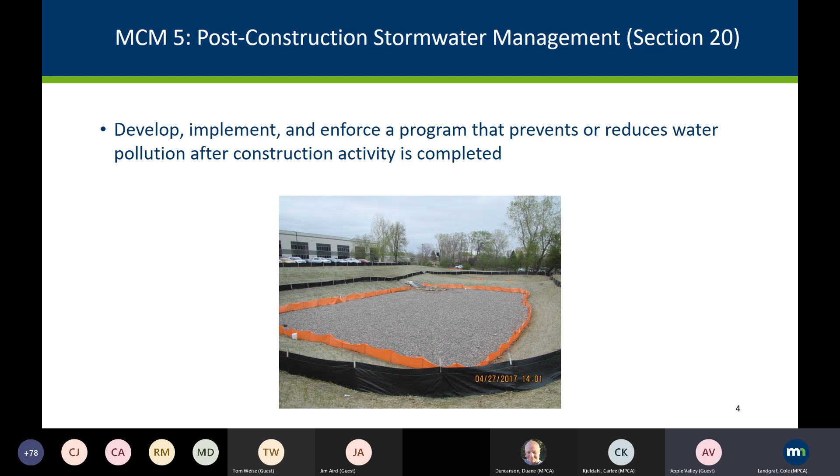What are the different components? How do you do that? What makes up the permit requirements for MCM5? First and foremost, you need to have a regulatory mechanism that establishes your legal basis, your regulatory basis for requiring those long-term BMPs after construction. You need to have a legal mechanism for the long-term maintenance of BMPs that have been implemented in MCM5 requirements, specifically those of your regulatory mechanism that you do not own or operate. You need to keep an inventory of BMPs that include that executed legal mechanism.

You also need to have written site plan review procedures. You also need to have staff training, enforcement response procedures for following up when you find non-compliance related to your regulatory mechanisms. Keep documentation, and then also perform an annual assessment of your program. And I will go into each of these in the slides coming up here. So I include a reference in the top right of your screen, so if you do want to follow along in the permit, it is available there for you.

First and foremost, like I said, you need to establish that foundation for your program, which we at the PCA believe is your regulatory mechanism. So to the extent allowable under state or local law, you're required to develop, implement, and enforce a regulatory mechanism that includes items 20.4 through 20.15 of the MS4 general permit.

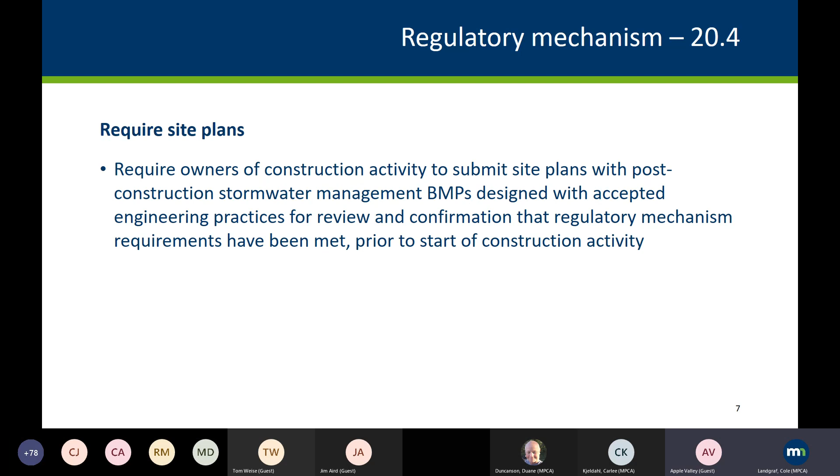Your regulatory mechanism also must require the submittal of site plans. You need to require that the owners of construction activity within your jurisdiction submit site plans with post-construction stormwater management BMPs designed with accepted engineering practices for your review and confirmation that the regulatory mechanism requirements have been met before the start of construction activity.

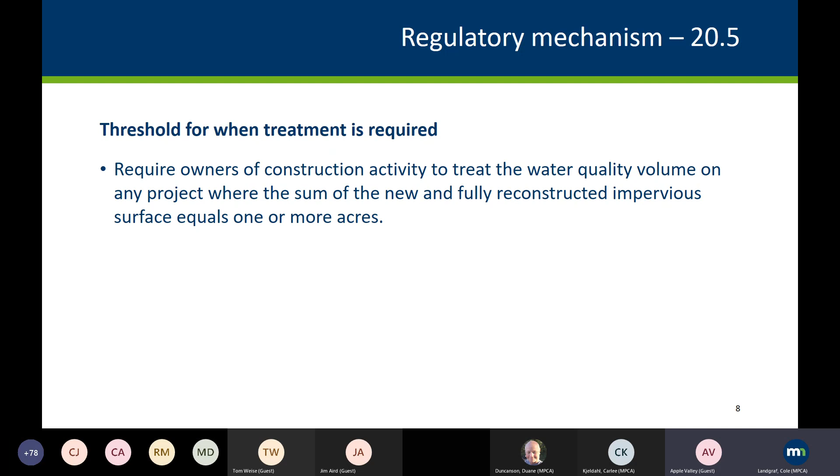In the new 2020 permit, we've also established a threshold for when treatment is required. So we require, as part of your regulatory mechanism, that you require owners of construction activity to treat the water quality volume on any project where the sum of the new and fully reconstructed impervious surface equals 1 or more acres. That's something in the 2013 permit, we really didn't have a clear threshold. In this one, it's all based on impervious surface.

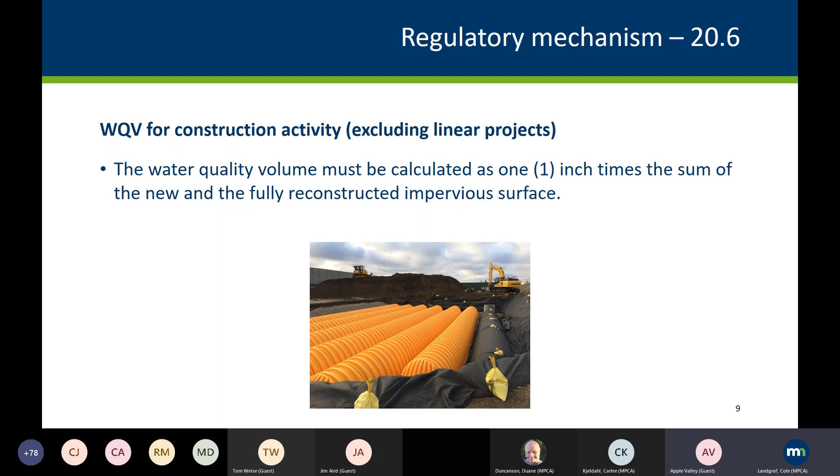We also have a calculation for the water quality volume for construction activity, which excludes linear projects. Here, the water quality volume must be calculated as 1 inch times the sum of the new and the fully reconstructed impervious surface. And then the permit also establishes a separate water quality volume for linear projects. So for linear projects, the water quality volume must be calculated as the larger of 1 inch times the new impervious surface, or 1/2 inch times the sum of the new and fully reconstructed impervious surface.

In the event you're unable to treat the entire water quality volume within your existing right-of-way, you need to attempt to obtain additional right-of-way, easement, or other permission to try and get that full treatment. In the event you've explored your options and you're not able to get the full treatment for linear projects specifically, you're allowed to maximize treatment and get as much treatment as you can. If you have, let's say, a road redevelopment project, and you're not able to get that full 1/2 inch of treatment after exploring additional right-of-way, you can look to maximize. So maybe you're not going to get the full 1/2 inch, maybe you're going to get a 1/4 inch, 1/10 of an inch, but you're going to try to get as much as possible near that goal.

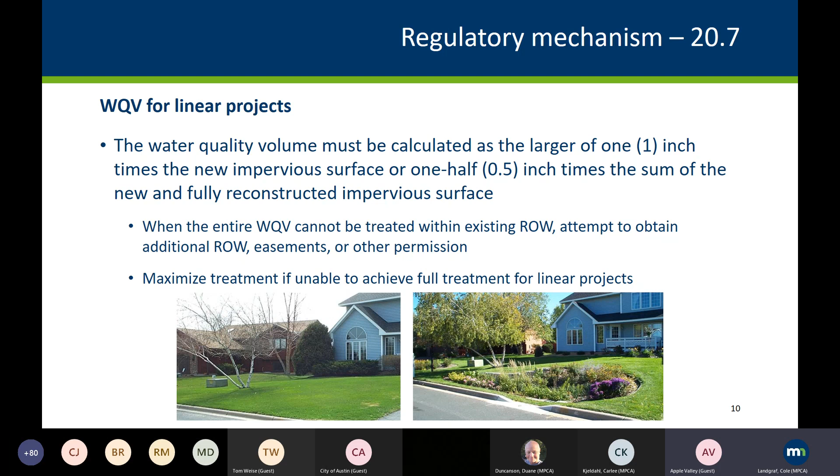So it's important to know what the definition of fully reconstructed means, to know when that trigger comes into play for post-construction stormwater management BMPs. So what does fully reconstructed mean? It means where the impervious surfaces have been removed down to the underlying soils. It does not include things like structure renovation, mill and overlay projects, and other pavement rehabilitation projects that do not expose underlying soils. It also does not include maintenance activities such as utility, catch basin, pipe repair and replacement, lighting, and pedestrian ramp improvements.

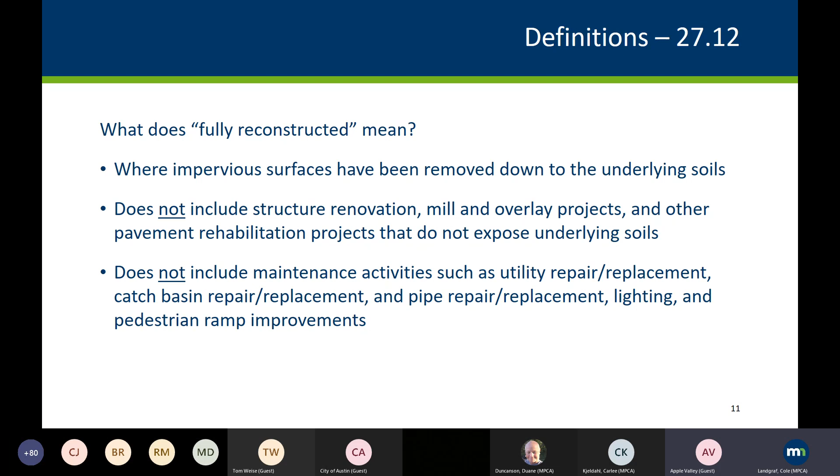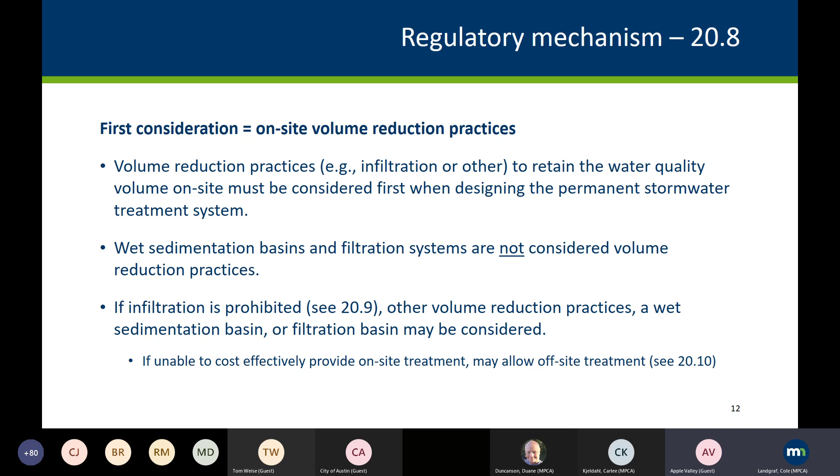We also require that your regulatory mechanism first considers on-site volume reduction practices. This could be infiltration or a reuse system or a green roof, but we ask that you always explore on-site volume reduction practices first when designing the permanent stormwater treatment system. The MS4 general permit does not consider wet sedimentation basins and filtration systems as volume reduction practices. And in the event that infiltration is prohibited, you may consider other volume reduction practices other than infiltration. You may consider a wet sedimentation basin or a filtration basin. We also do have an off-ramp for instances where you're not able to cost effectively provide on-site treatment, and you may explore off-site treatment.

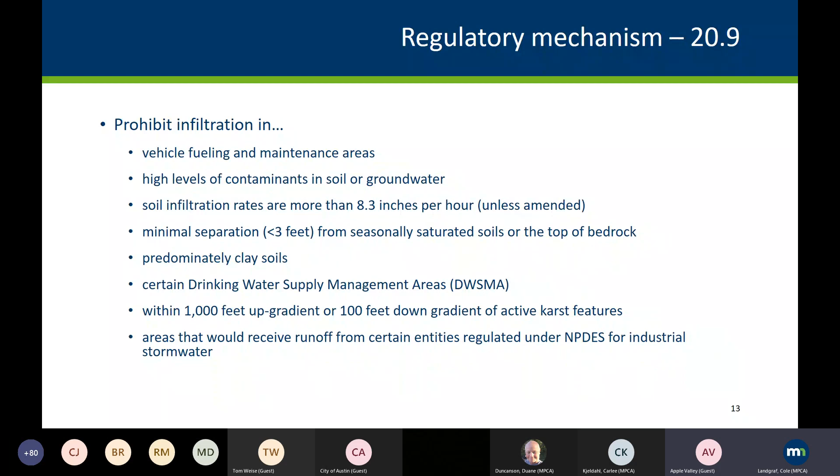So like I mentioned in the previous slide, there are certain conditions where we don't want you to allow for stormwater infiltration. We don't want stormwater infiltration in vehicle fueling and maintenance areas, where you may mobilize high levels of contaminants in soil or groundwater, where soil infiltration rates are more than 8.3 inches per hour, where there's minimal separation from seasonally saturated soils or the top of bedrock, where there's predominantly clay soils, in certain drinking water supply management areas, particularly those in high and very high vulnerability areas, and within emergency response areas. Also within 1,000 feet up gradient or 100 feet down gradient of active karst features, and then in some areas that would receive runoff from entities regulated under NPDES for industrial stormwater. These are places like automobile scrap yards and hazardous waste facilities.

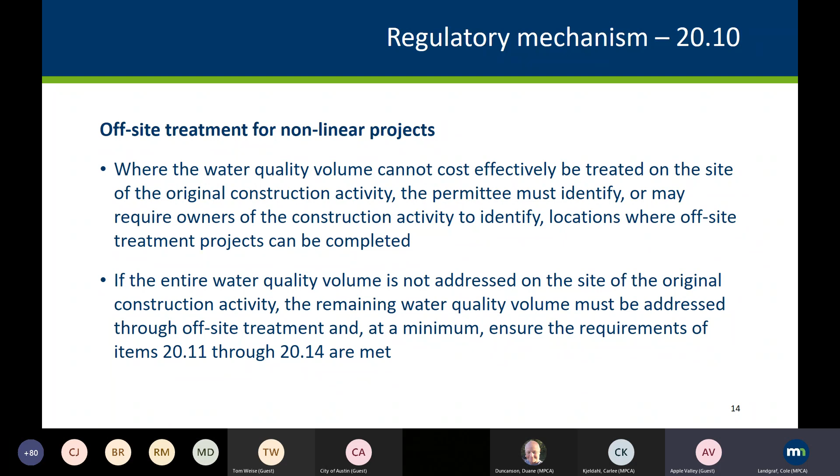We also have a requirement for off-site treatment for non-linear projects. Where the entire water quality volume cannot be cost-effectively treated on site, you must identify, or you may require the owners of construction activity to identify, locations off-site where treatment projects can be completed. If the entire water quality volume is not addressed on the original site of construction activity, the remaining water quality volume must be addressed through off-site treatment and ensure the requirements of 20.11 through 20.14 are met.

So first and foremost, we have a mitigation sequence. How do you determine the best or most appropriate site for off-site treatment? So we require that you ensure off-site treatment projects are selected in the following order of preference. Highest preference for off-site treatment are locations that yield benefits to the same receiving water that receives runoff in the original construction activity. Next consideration would be the locations within the same DNR catchment area as the original construction activity.

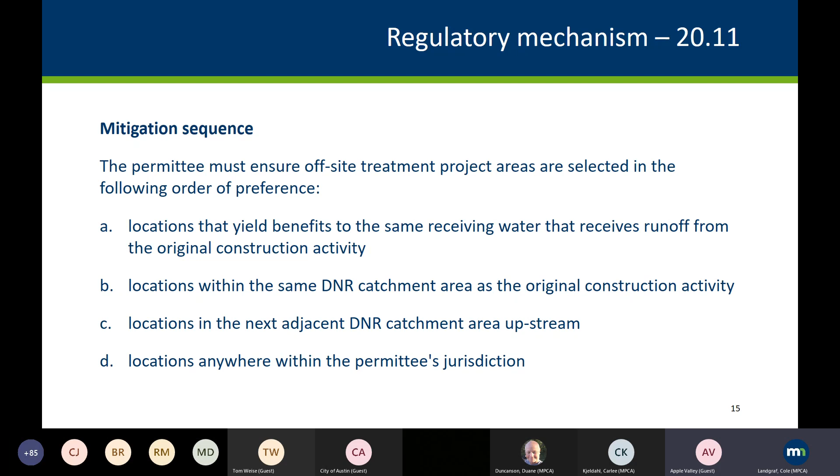Next is locations in the next adjacent DNR catchment area upstream. And then finally, you may consider locations anywhere within your jurisdiction for offsite treatment projects.

We also require in MCM5 that offsite treatment projects involve the creation of a new structural stormwater BMP, the retrofit of an existing structural stormwater BMP, or the use of a properly designed regional structural stormwater BMP. And we do not accept routine maintenance already required by the permit to meet this requirement. You have to retrofit or create a new BMP or use that existing properly designed regional BMP.

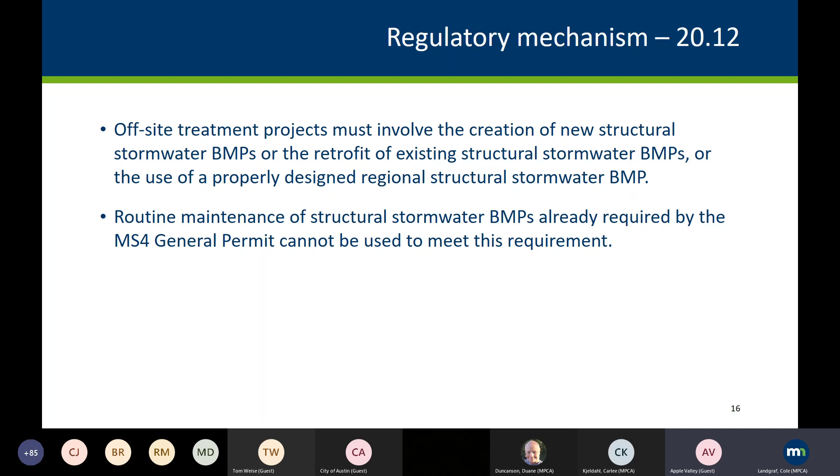We also have a requirement that offsite treatment projects must be completed no later than 24 months after the start of original construction activity. But we do have a caveat there. We do allow, in the event that you determine you can't do it within 24 months of the project starting, you are allowed to provide the reasons and the schedule for completing the offsite treatment project in the MS4 annual report.

This was something during the public notice process of the 2020 permit. We did hear from a number of stakeholders that the 24-month timeline could be challenging in some instances, and some additional flexibility would make this option more attainable.

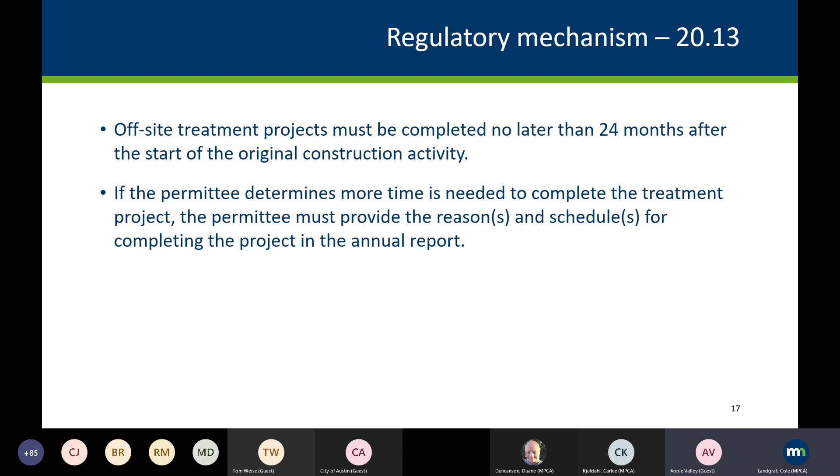We also allow for payment for offsite treatment. So in the event that you do receive payment from an owner of a construction activity for offsite treatment, you are required to apply that payment towards a public stormwater project. And you have to make sure that that project also complies with the requirements in the previous slides.

So again, creating a new or retrofit BMP, making sure that those projects follow the mitigation sequence, and then also making sure that you complete the project within 24 months or document that reason and schedule for the project in the annual report.

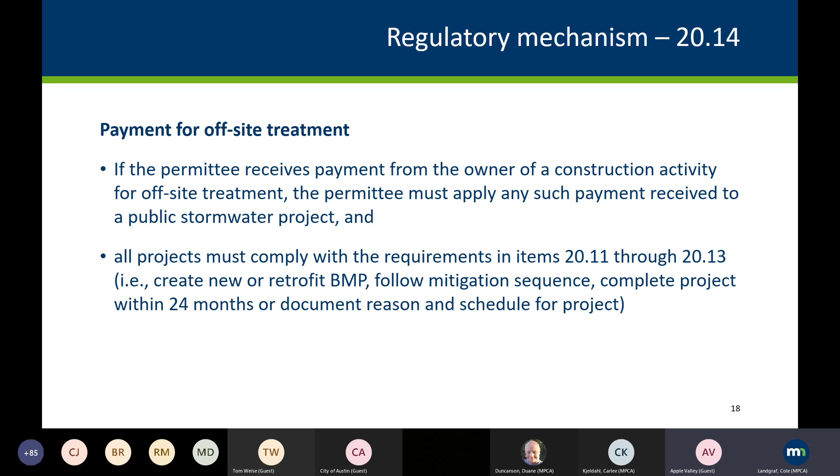So many of you are probably well aware of this by now, but we do have an MCM5 compliance flowchart available on our website. Carly, maybe if you have it available, put that in the chat for folks. But this is kind of a nice 2-page document that breaks down when MCM5 requirements apply, which ones apply, and you can follow the flow chart to make determinations on what applies and what considerations you can make along the way. So I highly recommend you take a look at that if you have not already. And this will be just a helpful tool to make sure you are meeting MCM5 requirements.

So moving on from the regulatory mechanism, the standards portion, I guess I would say, we also require that you establish a legal mechanism for the long-term maintenance of BMPs not owned or operated by the permittee. This is an existing requirement of the 2013 permit, but just want to emphasize it again here, that you must make sure that you have this legal mechanism in place. This is generally going to be for those privately owned BMPs that were installed to meet your MCM5 regulatory mechanism requirements.

This legal mechanism must allow you to conduct inspections of structural stormwater BMPs, perform maintenance, and assess costs for those structural stormwater BMPs when you determine the owner of that BMP has not ensured proper function. You must also preserve your right to ensure maintenance responsibility when responsibilities are legally transferred to another party, and you must protect and preserve those BMPs that were installed as a result of construction activity.

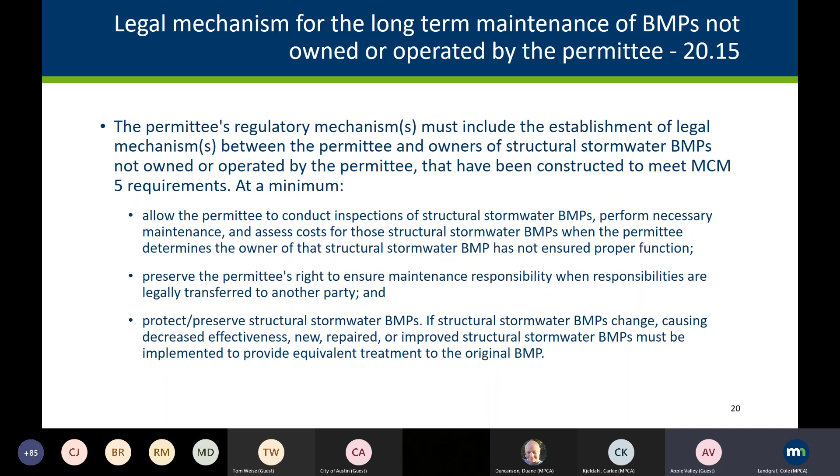Moving on, you are also expected to keep an inventory, a written or mapped inventory of all the different structural storm BMPs that meet the following criteria. So BMPs that have an executed legal mechanism, those long-term maintenance agreements in place, and the BMP was implemented on or after August 1st of 2013, need to be in this inventory. So these are specifically those permanent stormwater BMPs that were implemented to meet your MCM5 regulatory mechanism, keeping track of where those are located, in written or mapped form.

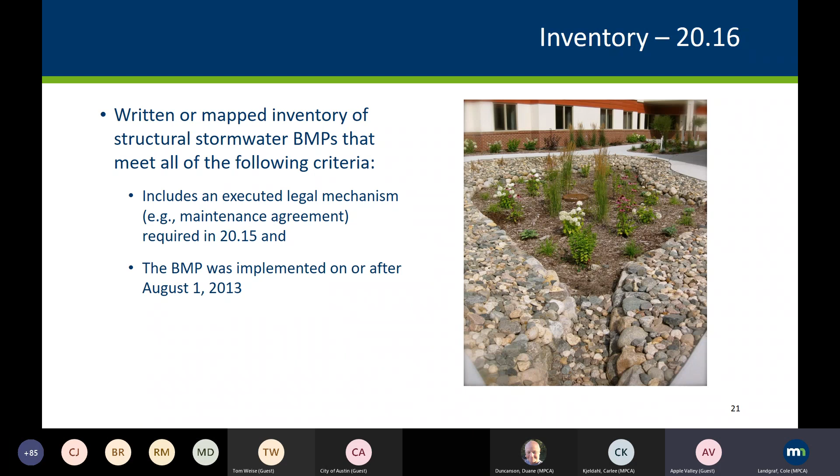You're also expected to have site plan review procedures: implement written procedures for site plan reviews conducted by you before the start of construction activity, essentially to ensure compliance with the requirements of your own regulatory mechanism. What I'll comment on here is just make sure the procedures are reflective of your program. If that's a flow chart, if that's a decision tree, just make sure it's something that works for your organization.

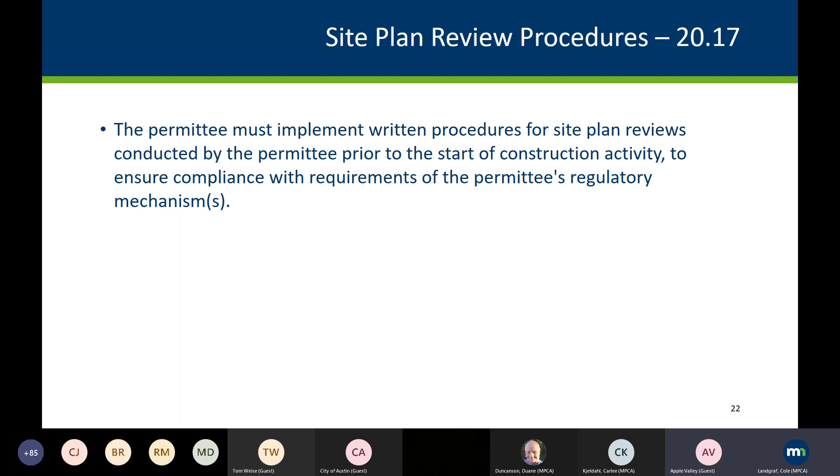And make sure you're updating them periodically too. If things change over time, which is kind of the goal with the MS4 permit, your program's not going to remain static. You're going to find efficiencies and more effective ways to do things over time. Just make sure you're keeping those procedures up to date.

We also expect staff training. You're training individuals, making sure that they receive training commensurate with their responsibilities as they relate to your post-construction stormwater management program. And we identify individuals that are responsible for conducting site plan reviews or enforcement related to MCM5. And anyone that's been trained, after that initial training, we do require in the permit that they receive some sort of a refresher training every 3 calendar years following their initial training.

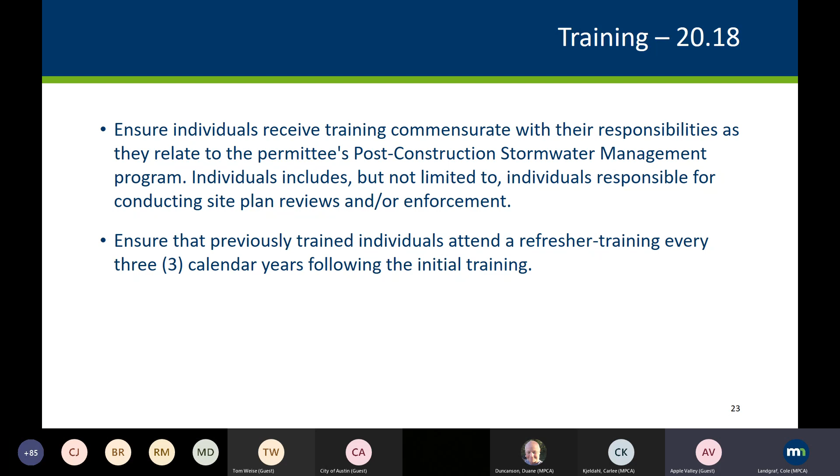Enforcement response procedures. So the permit requires that you maintain written enforcement response procedures to compel compliance with your MCM5 regulatory mechanisms. At a minimum, your ERPs must include a description of the enforcement tools available to you and the guidelines for the use of each tool, and also identify the name or position title of responsible people for conducting enforcement for your organization.

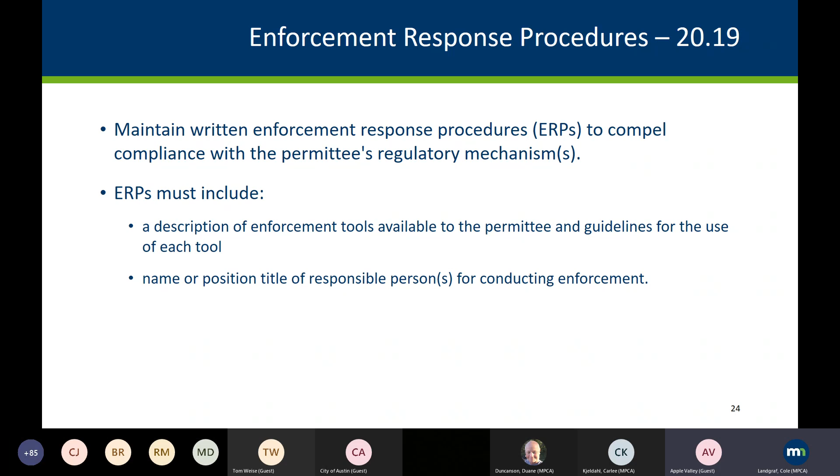And as far as MCM5 enforcement goes, it's probably going to be, what's your process when you identify a failing permanent BMP for enforcing that long-term legal mechanism, or in the event that you've approved or confirmed a site plan met your regulatory mechanisms, you discover after the fact that that's not what got installed. Something you identified as the BMP changed. It's not as effective as you thought. What's your process for compelling compliance through your regulatory mechanism?

Documentation. So we have documentation components for site plans, trainings, and enforcement conducted. So first and foremost, whenever you conduct a site plan review, we want you to maintain supporting documentation used to determine compliance with MCM5, including any calculations you made for the permanent stormwater treatment system, the water quality volume treated through volume reduction practices compared to the total water quality volume required to be treated, and documentation associated with any off-site treatment projects

that you authorized, including rationale to support the location of the permanent stormwater treatment projects, any payments received and used for a public stormwater project, as well as all legal mechanisms drafted, those long-term maintenance agreements, including dates and the responsible parties involved. We also expect that you keep documentation of any trainings that staff attend, including topic matter covered, names of those individuals, their department within your organization, and the date of any events.

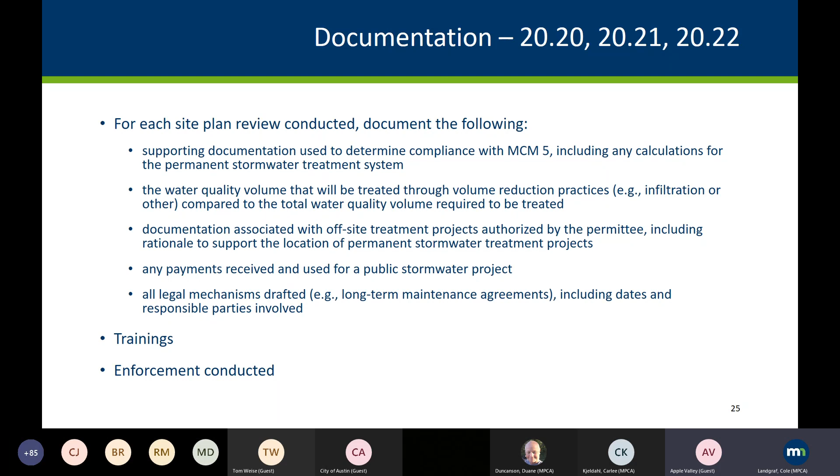And then finally, we also require that you document any enforcement that you conduct related to MCM5, specific to your enforcement response procedures. This is the date of discovery of the violations, who's responsible for the violation, any corrective actions or referrals to other organizations, and then also make sure you're keeping documentation or a record when violations get resolved.

And then finally, for MCM5, we also require that you conduct an annual assessment. So this is a component of every MCM, and it's basically this idea that you are reflecting, looking back at your program to make sure you are meeting the permit requirements, and you're looking for avenues or ways that you can improve your program.

We also require: are you achieving those measurable requirements? Measurable requirements are activities that must be documented or tracked as applicable to the MCM. So for MCM5, it's going to be things like, do you have an updated inventory? Are you training the appropriate staff? Do you have the site plan review procedures in place and are you reviewing plans before construction activity begins? Performing inspections, for example, of long-term BMPs.

Any enforcement conducted. Make sure you're having an intentional opportunity every year to look back at your program and see if you're meeting permit requirements, and whether there are areas where you might be able to improve or make things more efficient or effective. And then finally, this component requires that you complete this assessment before you submit your annual report, and you also need to document any modifications you make to your program as a result of this assessment.

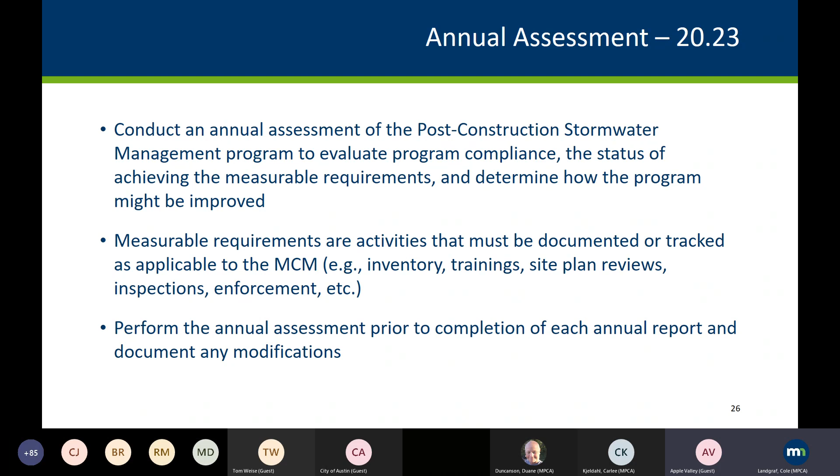So we do have some guidance available on MCM5. It's primarily available in the Minnesota Stormwater Manual, in the digital document library. Carlee, maybe you can put the link in the chat. But if you just either go to the homepage of the Minnesota Stormwater Manual or Google MS4 DDL, it should be the first search result that comes up. You can go to it that way.

And if you go to MCM5, we do have some examples that MS4 permittees have generously shared of different materials such as long-term maintenance agreements, ordinances, documentation, and different site plan review procedures. One thing to note here is this is something we do need to update over time.

These materials were originally reviewed under the 2013 MS4 general permit, and this is something we need to populate over time as permittees allow us to share materials we may discover during audits, to get up to speed with the 2020 MS4 general permit. A lot of the materials are still relevant for the 2020 MS4 general permit, but if you're confused or want to double check, I highly recommend comparing any document you take from this site against the 2020 permit requirements.

And also, if you're concerned, feel free to reach out to your assigned MS4 staff person, and they can definitely help you out and work with you to determine if that example document or material is sufficient under the 2020 MS4 general permit.

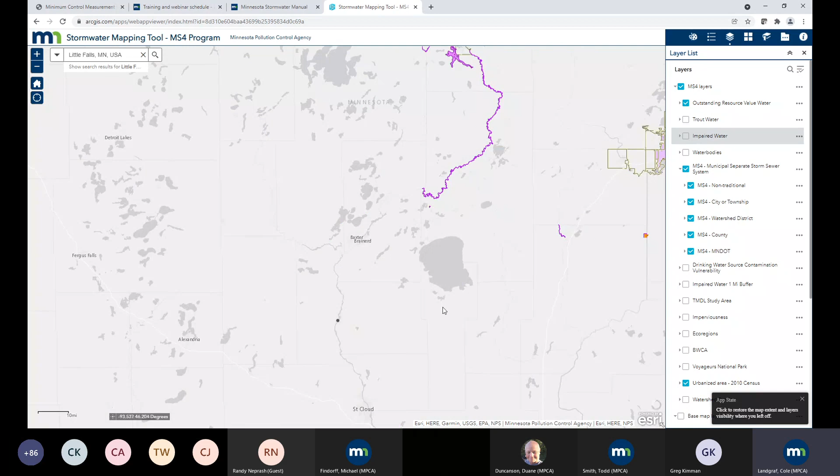You're going to see this dashed purple line or the fully purple pink filling that indicates that it's urbanized area. And Little Falls, you're far enough outside of a metro, a larger city, that you wouldn't fall within the urbanized area. So I recommend checking out this mapping tool.

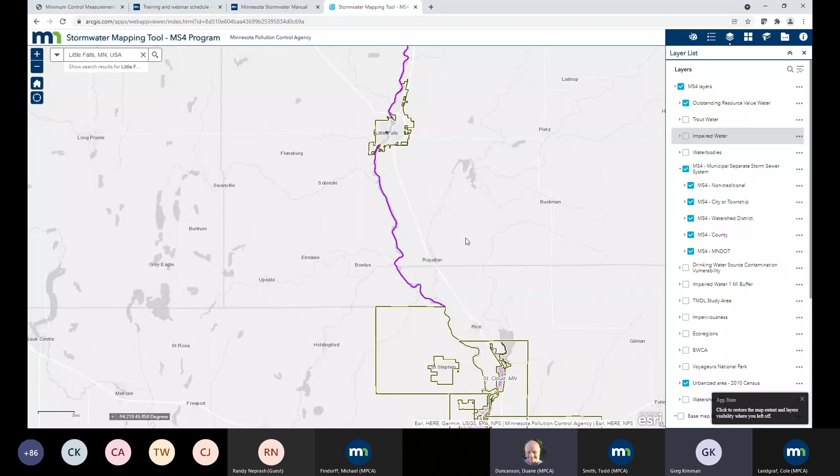Greg, I would venture to guess that 50 years from now, there will not be urbanized area out there unless the population just explodes. I think you're right. Yeah, the nearest urbanized area to you is St. Cloud. All right. Thanks for that.

I'm going to go to another email question. Jane had asked, our treatment volumes are more stringent than those listed in the 2020 MS4 permit. We require NURP level pretreatment, storage of the 100-year event on site, and infiltration of 1 inch over the entire site, not just the impervious. We also require infiltration testing confirmation post-construction.

As the majority of the city does not have an outlet to a major river system, these more stringent requirements are one of the ways we build resiliency into our system. Are we allowed to keep these more stringent requirements? Yeah, and that's a yes. You may keep more stringent requirements. The 2020 permit is meant to set basically the baseline or the minimum requirements. So if you have more stringent standards, you are allowed to keep those as you see fit.

We will go back to the chat here. Let's see. So Greg Kimman had a question: with the NPDES permit listing both owner, MS4, and contractor in the permit, does the MPCA view the MS4 entity as a partner in permitting or permittee pertaining to violations? That seems like it might be a little bit more.

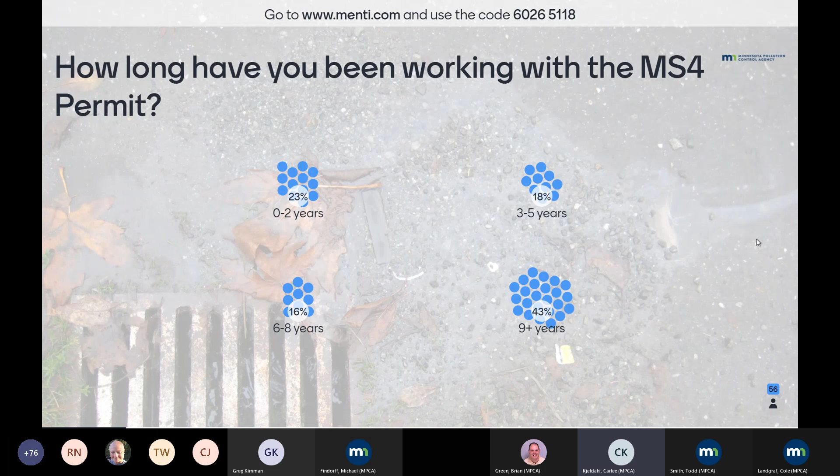So I'm going to move on to the next question. So what is the status of your post-construction stormwater management regulatory mechanism to meet the 2020 MS4 permit requirements? Give everyone probably a minute or so to answer. Obviously, there's no right or wrong answer here. We're just trying to gauge where folks are at in this process.

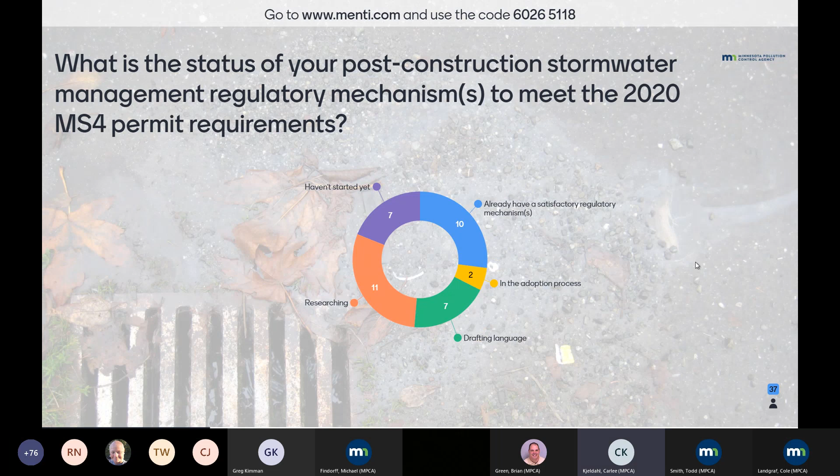All right, I think I'm going to wrap it up here. Looks like we got people kind of all across the board, so that's good to know on our end. Thank you. All right, I'm going to move on to the next question here. Within your MS4 boundary, what percent of construction projects over the last few years do you estimate have achieved full treatment on site?

All right. Probably 30 more seconds. If you're answering, go for it. All right, great. Thank you. And if I'm advancing too fast, I think you still have the ability to answer and just move along with me.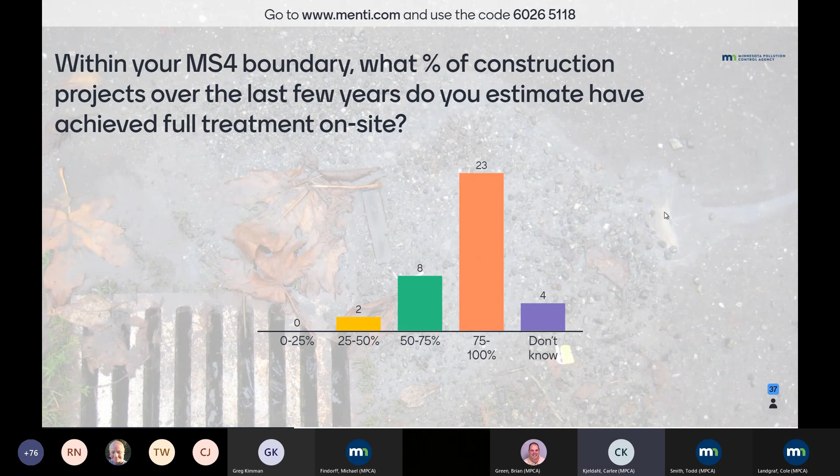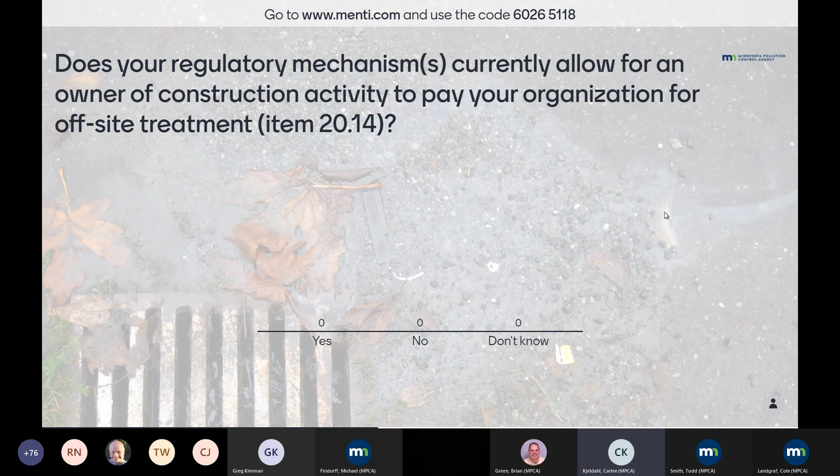So our next question is, does your regulatory mechanism currently allow for an owner of construction activity to pay your organization for offsite treatment? Item 20.14 in the MS4 permit. And again, these questions are just kind of to gauge where everybody's at. There's no right or wrong answer, and this is all anonymous. So this just gives us an idea going forward.

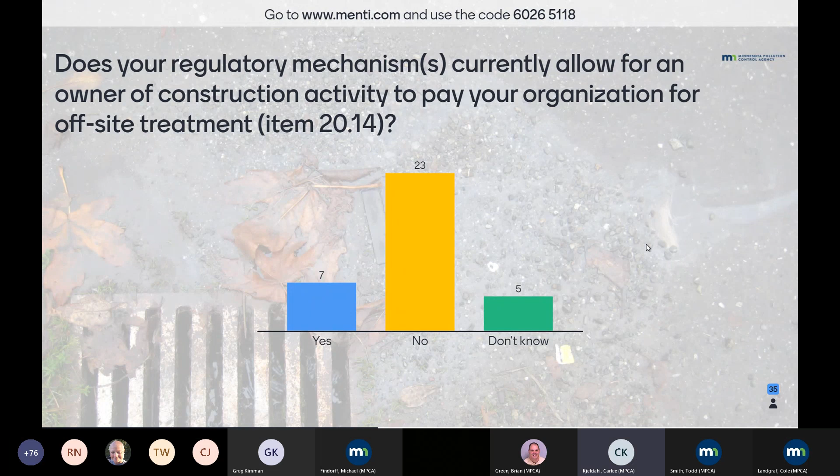All right, I'm going to move on to the next question here. Considering the infiltration prohibitions, what is the estimated percentage of your MS4 jurisdiction that is suitable for stormwater infiltration? And I think this question is just really coming out of, everyone is spread around the state and everyone has different means for infiltration. So it's always interesting to see what everyone can and can't do.

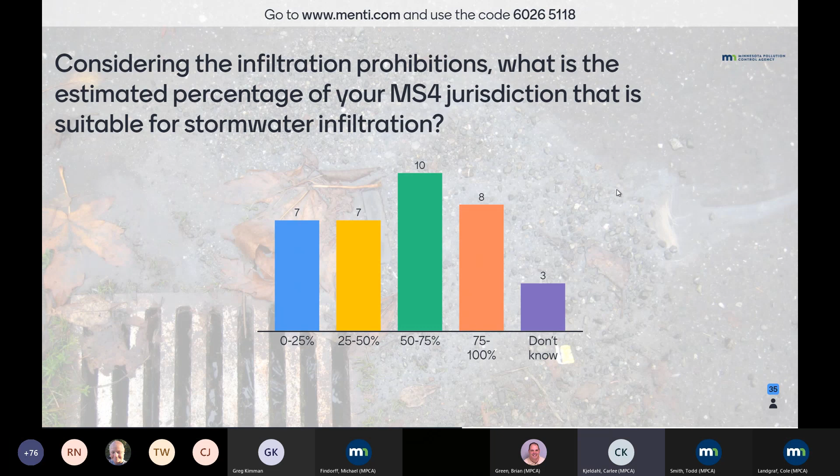All right, great. I'm going to move on to the next question. I promise we should be almost done here. So this is going to be an open-ended question. What guidance or materials would you suggest be developed and made available by the MPCA related to today's topic? And if there's not enough space for you to elaborate in the text box that you have on your screen, feel free to send an email to the MS4 permit program inbox, and we can definitely look at that and see what we can create that would help you guys out.

All right, and that's okay if no one has any suggestions. This is just a way for us to kind of gauge what we need to create going forward. Great, so it looks like we're getting some responses. This is awesome. All right, I think I'm gonna wrap it up here in about 30 seconds. All right, awesome. You can continue to submit those if you want. Otherwise, I'm going to move on to the next question here.